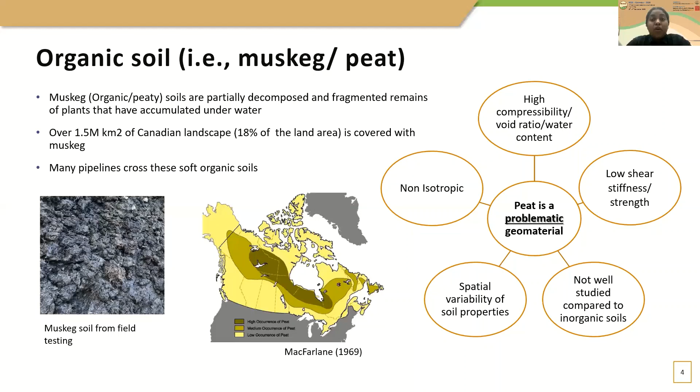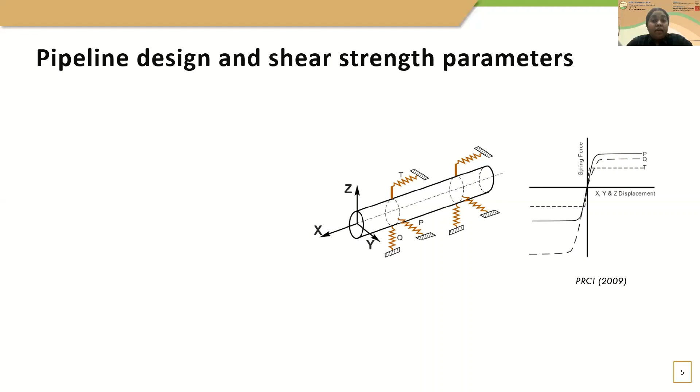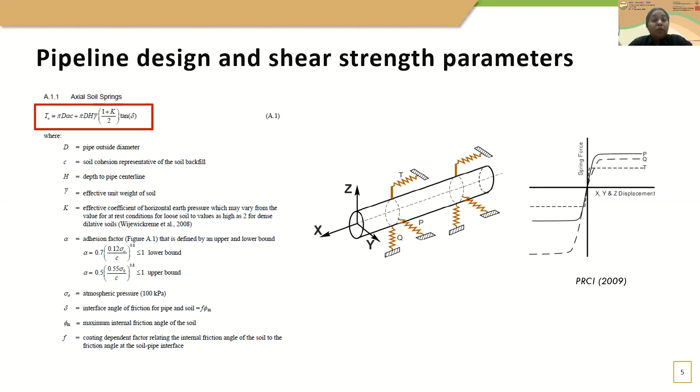If we take axial soil springs as an example, and the design criteria mentioned in PRCI, axial shear resistance developed at a given soil pipe interface is based on either undrained shear strength or the interface friction properties at the soil pipe interface. When we are concerned about organic soils, undrained shear strength plays the major role. Therefore, when organic soil is considered, undrained shear strength is used in defining the soil springs or load displacement curves for soil pipe interaction analysis.

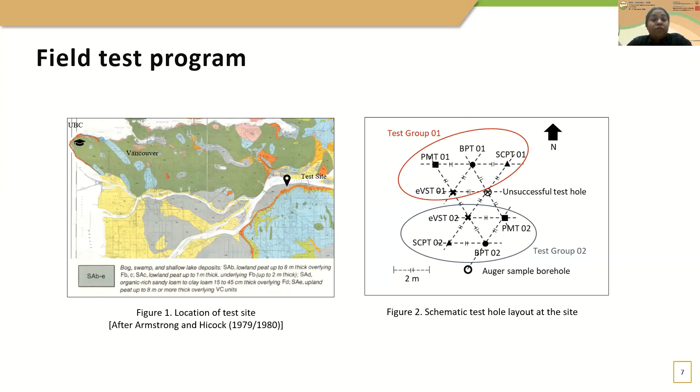Keeping this in mind, we have conducted a comprehensive field and laboratory experimental program to characterize muskeg for pipeline design work and use the resulting parameters as input in numerical modeling of soil pipe interaction along the way. For the field investigations, we have selected a site crossed by pipelines that are in operation. This site is located in Surrey, British Columbia, in Canada, and the specific location of the test site is indicated in the map on the left-hand side. For the base of the map, I have used a surficial geology map of the Metro Vancouver area, and a site layout illustrating the test locations and test groupings is also shown on the right.

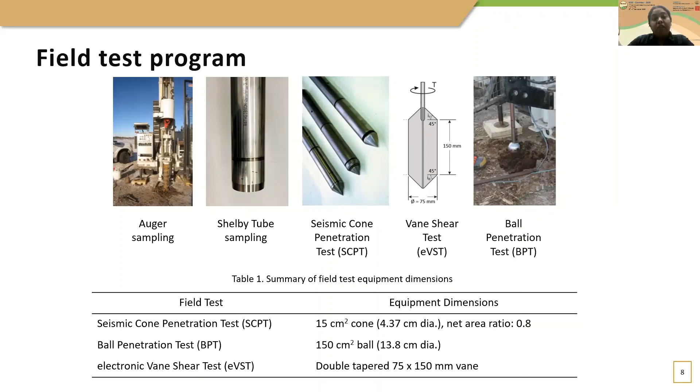For the field test program, we have done in situ seismic cone penetration tests, electronic vane shear tests, and ball penetration tests. For the laboratory tests, we have extracted some bulk samples using auger sampling, and also relatively undisturbed samples using Shelby tube sampling. All the details of the equipment dimensions are listed in the table, and I'm not going to go through the table, but we have used standard size equipment for the field testing program.

If we move to the laboratory test program, we have conducted tests to determine the index properties to characterize and classify the soil. According to soil classifications, the tested organic soil is identified as amorphous peat. These properties are interrelated, and all these physical properties affect the engineering behavior of an organic soil to a great extent. If we focus on the water content, it is in the range of 350 to 650 percent within a depth ranging from 2 to 7 meters.

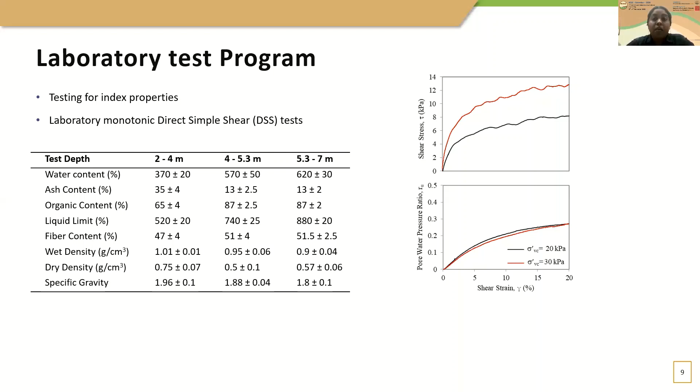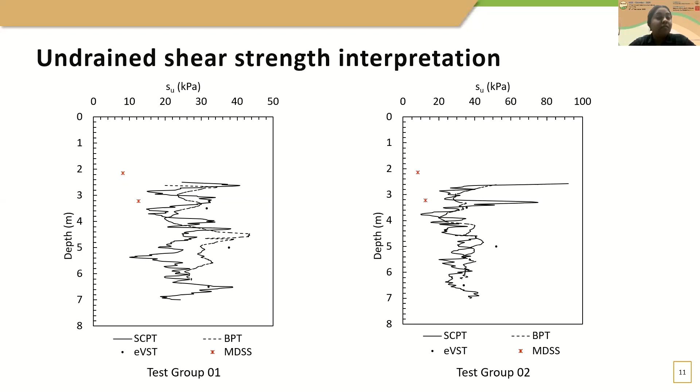The Su values extracted from the laboratory monotonic DSS test results are also superimposed in these figures for comparison, and the lower Su from the laboratory DSS tests is likely to be due to sample displacement, sample disturbance and change in soil fabric during sample reconstitution.

Moving on to a summary of findings, initial findings suggest that the ball penetrometer provides a suitable way of estimating undrained shear strength of organic soils, as it mobilizes a relatively large volume of soil mass during penetration compared to cone testing, and that is preferable to characterize organic soils, particularly considering their variable nature and low strength and stiffness properties. This is also aligned with the previous findings of various researchers, including Boylan and Michael Long.

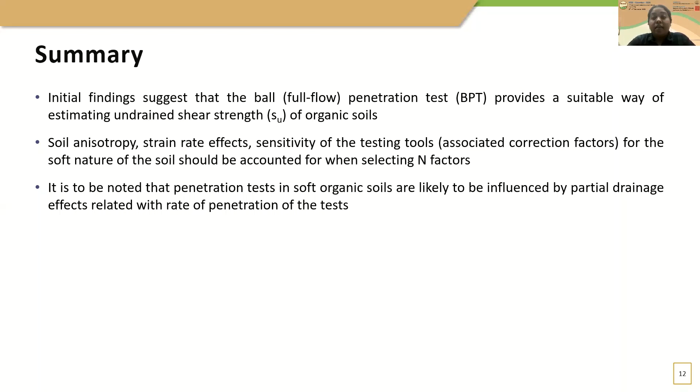Also, soil anisotropy, strain rate effects, and sensitivity of the testing tools to the soft nature of the soil should be accounted for when selecting N factors when converting penetration resistances to undrained shear strength. It should also be noted that penetration tests in soft organic soils are likely to be influenced by partial drainage effects related to the rate of penetration, and these effects have to be critically considered when interpreting strength parameters from penetration tests, especially in organic soils, which are soft and weak in strength.